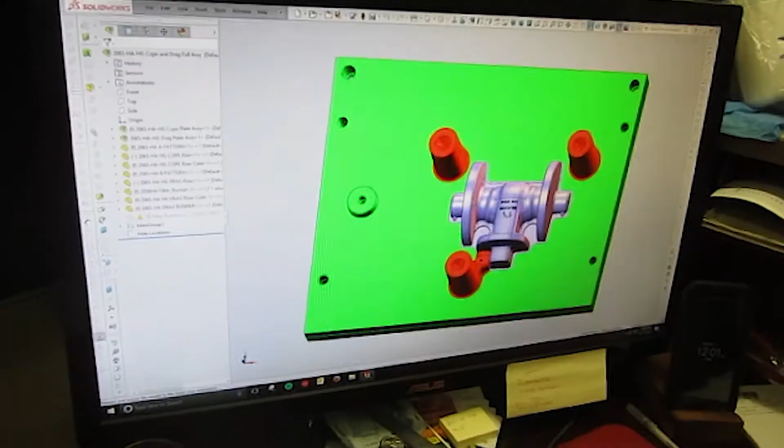We get a model of the casting from our engineering department. From there, we will model up the pattern, and we will also model up the mold. What we get from our engineering department is just the casting and the core. We end up building the core boxes in case we need a core, and the pattern, to make the molds.

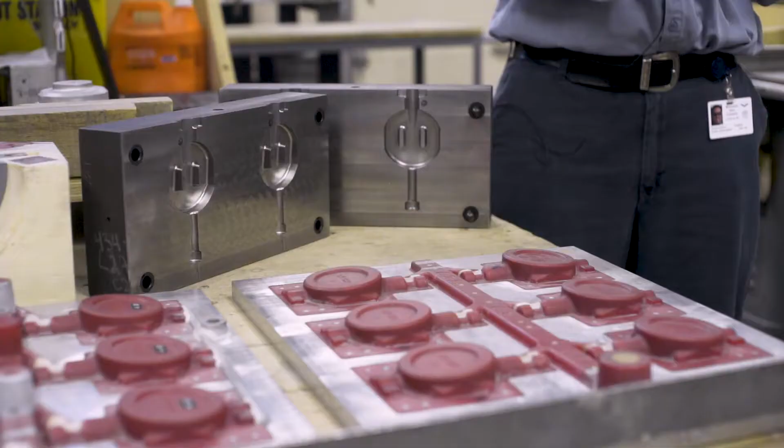The mold model will be used in the simulation software to run iterations of the design. So essentially, all the gating that's not part of the casting that you see over here is something that we design here and we prove out in the simulation software before we cut the tool. Once we have our mold modeled, we run a simulation of the filling of the metal and the solidification of the metal into the mold cavity.

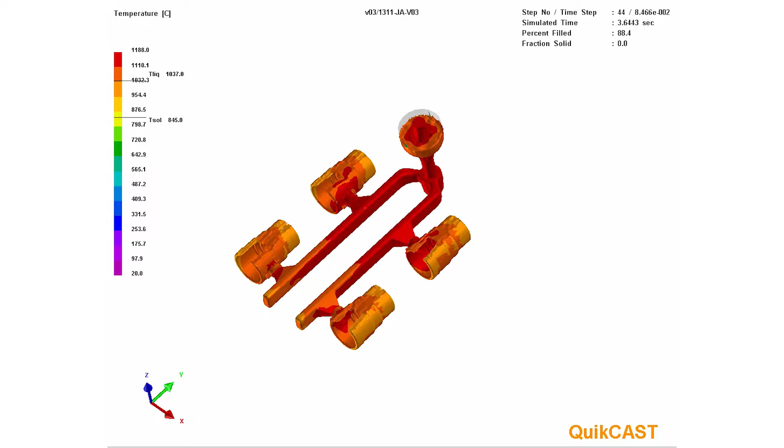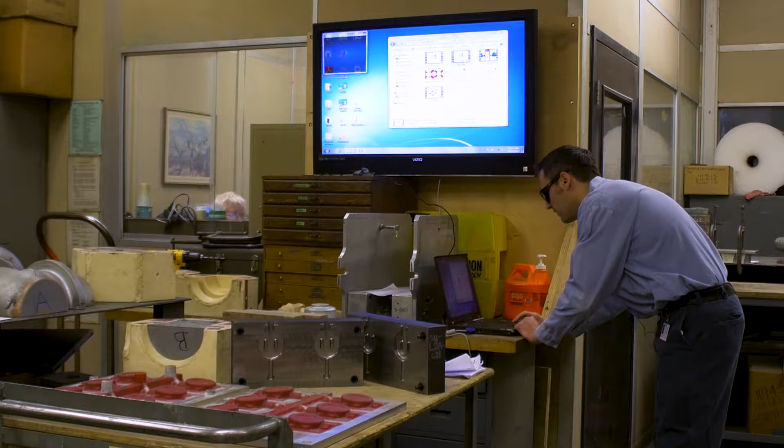We look at several things. Right now you can see the filling of the mold cavity with a temperature gradient on your left-hand side. We also look at velocities inside the mold. So essentially you're seeing that same filling video here, but instead of a temperature distribution, you're looking at a velocity distribution.

We look at common defects in casting, for example, shrinkage porosity. We had a gating design on the right-hand side where you had shrinkage in your casting, and you don't want that, so we changed the gating and were able to pull the shrinkage inside the gating, which is what we want, since the gating gets recycled. That's not something we send on to the machine shop. So that enables us to run design iterations before even having to cut the tooling.

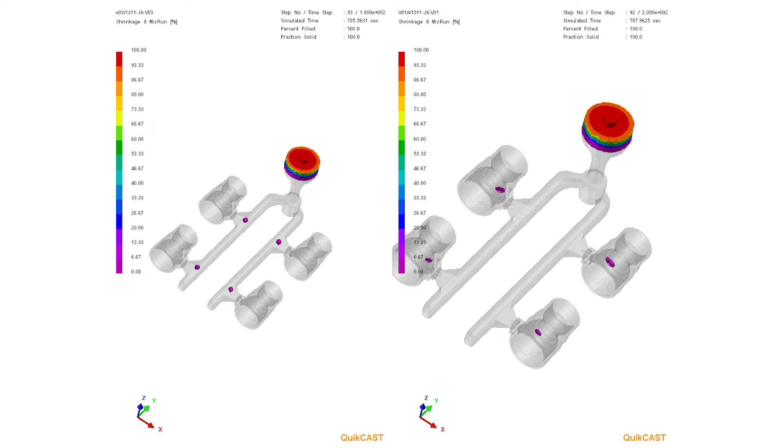Another common defect for us in the valve business is microporosity. Here we pressure test all of our valves, and most of the components that go into the valve. Sometimes you have a casting that's machined and looks great, and you pressure test it and it's leaking, or there's a little water weeping when you pull it off the test fixture. You look at it with your naked eye and cannot see anything, but you have that water weeping out, and that's due to microporosity in a lot of cases.

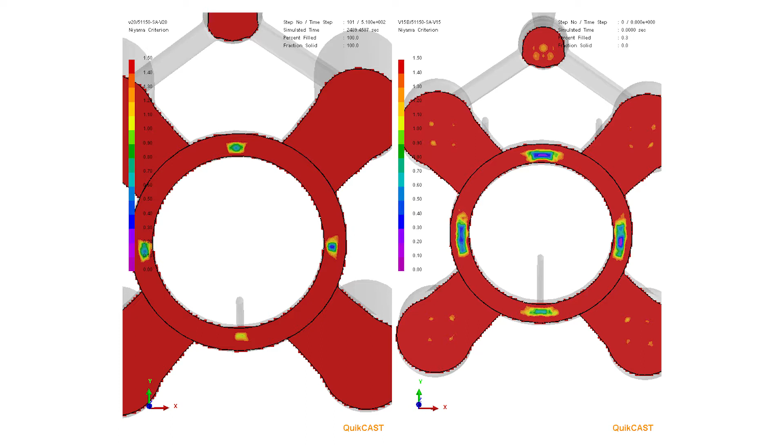That's something that we can adjust with the software. The areas in purple that you can see at noon and at 3 o'clock give you a likeliness of microporosity, and we can change the gating to eliminate that. And that's what we did.

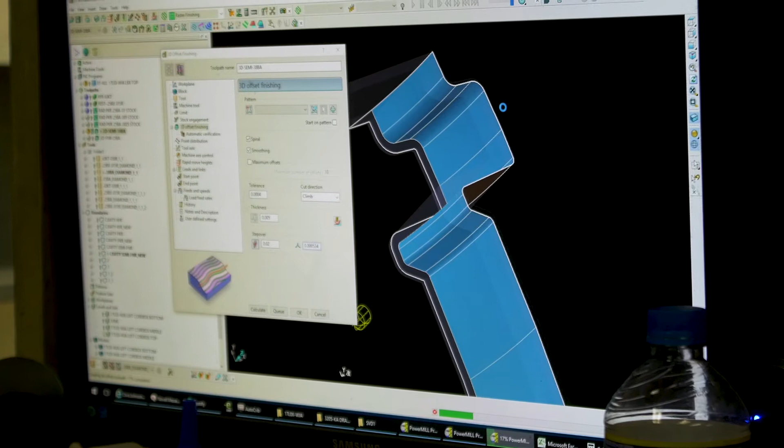Once we have the gating and the plate layout designed, we finish our pattern models and send them to the CNC department, where the CNCs are programmed. Then we cut everything on the CNCs, and do the final assembly on the bench. Same thing for our core boxes. That's a cast iron core box, but we also make them in aluminum or plastic.

Our patterns typically are in plastic, and depending on what mold line they go onto, the plates will be aluminum or wood. Sometimes our patterns will be made out of aluminum, and our gating usually is made out of plastic.